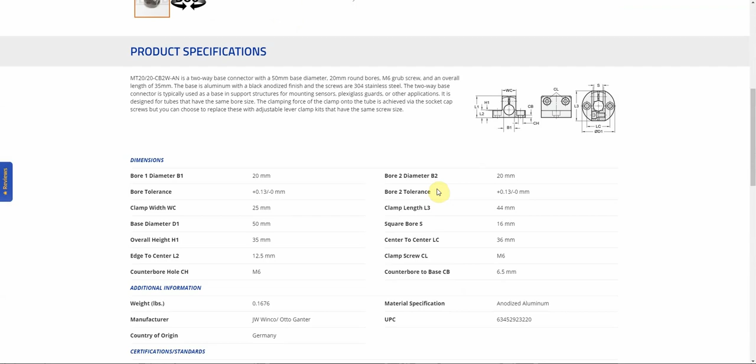It is important to note that this part starts with MT20, which identifies connectors, bases, and bracket clamps with a 20mm round or 16mm square bore. This is a unique identifier that makes selecting the rest of the components in our system easier. I quickly look over the dimensions and add to cart.

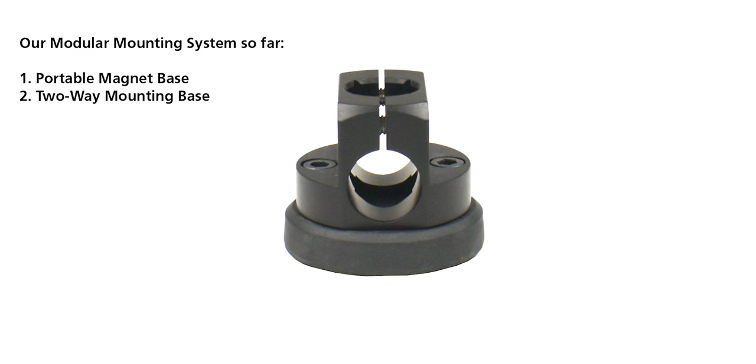I need a tube that can fit into the mounting base. I use the Fits with Clamps filter to see options that fit with my MT20 mounting base. I want a smaller selection and set my overall length to the longest size available, 300mm, because I will need to precisely adjust the sensor within a range of about 150mm. The option with scale is best suited for my system. I'm adding to cart directly from this page since there is nothing else dimensionally I need to review.

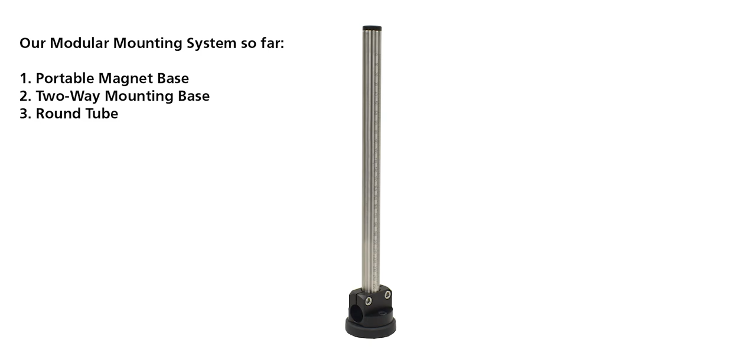I also want to add a tube cap to the end because I'll be running wires through my system. When I install the system, one modification will be drilling a hole in the top of the tube cap to feed the wires through. This helps protect them from coolant, chips, and other contaminants in the operating environment.

I go back to the tubes and rods section, select tube end caps, and filter to see options with the 20mm OD. There is only one option. Each tube has only one tube cap that fits, so I'm safe to again add directly to the cart.

Now that the bottom half is complete, I need a mini clamp connector with two bores to connect the top and bottom half of my system. The adjustable two-way connector is a good choice for me because it allows me to easily adjust the angular positioning and height of my sensor as needed.

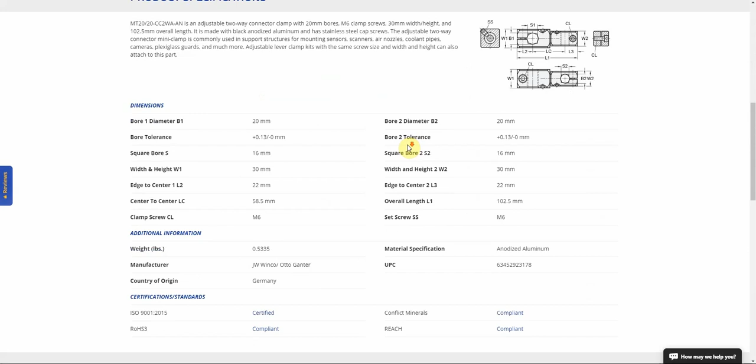I know my tube fits with MT20 clamps and there are only 12 options, so I simply scroll until I see an MT20 adjustable two-way connector. I click into the part to review dimensions. I take note of the 30mm height and width and the M6 clamp screw.

These two dimensions will help me find a clamping lever kit to pair it with. I add it to the cart and move on to selecting my clamping lever kit.

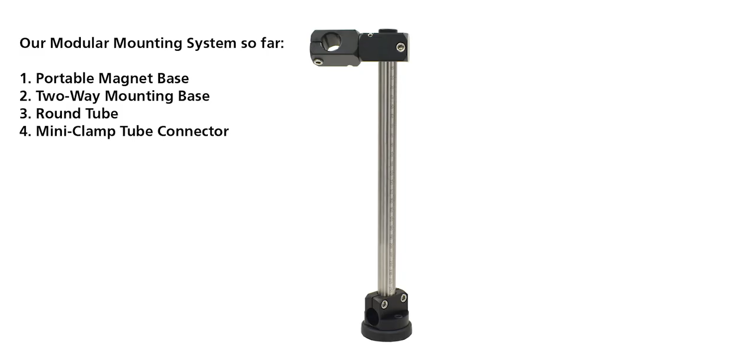The clamping lever kits are used to replace the standard clamp screw with an adjustable clamping lever. It allows me to adjust the clamping pressure of the connector with no tools, making it simple to reposition my sensor height as needed. I go into the clamping lever kits for mini clamps and filter my options to see what has a sleeve and stud length of 30mm to match the width and height of my connector.

There is only one option that has M6 in the part number, so it's the one I need. I click onto it to see the dimensions and confirm it meets all of my requirements, and then add to the cart.

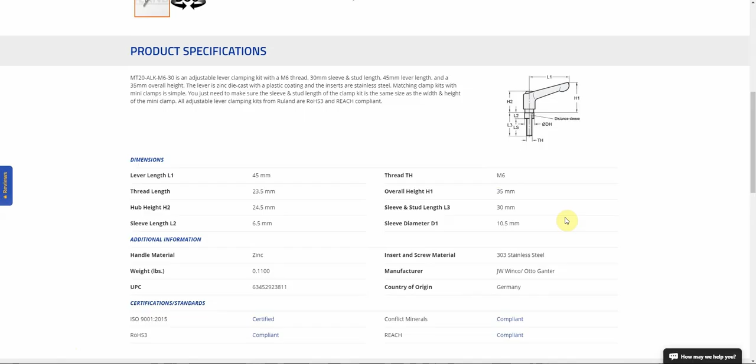Next, I need another tube to add to the other half of my adjustable two-way connector. I go back to the tubes and rods section and filter to see which tubes fit with MT20 clamps. This time, I want the shortest length, so I filter to see what my options are with a 100mm length.

The height of the top half of my system won't be adjusted, so I don't need a scale. The square tube is my choice because it's lightweight. I look over the dimensions, take note of the 16mm square OD, and move on to finding a bracket clamp.

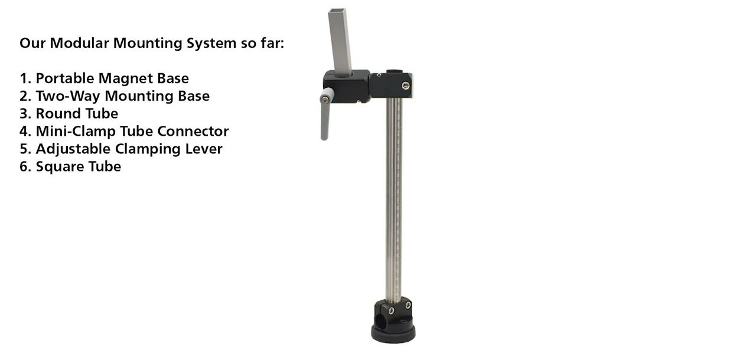There are not many bracket clamps to choose from, so I scroll down instead of filter until I see the MT20 options to fit with my MT20 square tube. I want the anodized version and click into the product page to review dimensions.

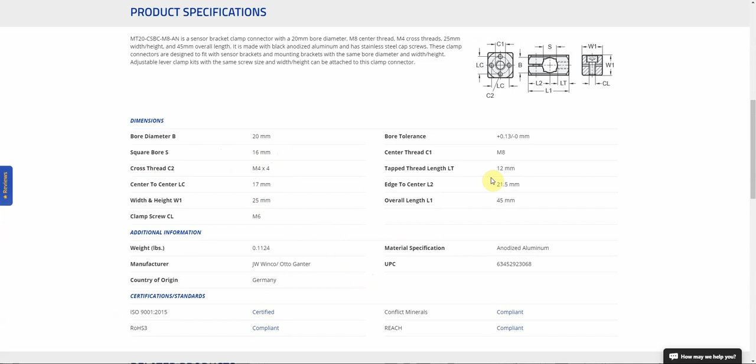When reviewing, I double check that it has a 16mm square bore, and then look over the center and cross thread dimensions, which allow me to mate it with a bracket clamp. I note that this part has an M8 center thread and M4 cross threads. Add to cart and move on.

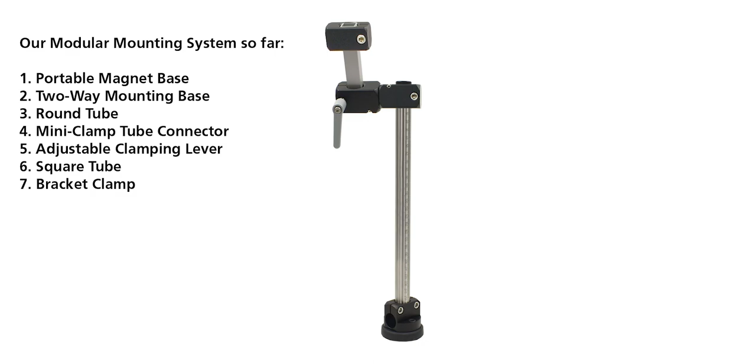Finally, I need to find a mounting bracket that can fit M8 center and M4 cross threads. I filter by the M8 center mounting screw and notice that they all have the same cross pattern as my bracket clamp. Any of these would work for me, but I filter by 12mm bore diameter because I already have a 12mm round sensor. I check the specs to verify it can pair with my clamp and move on to checkout.

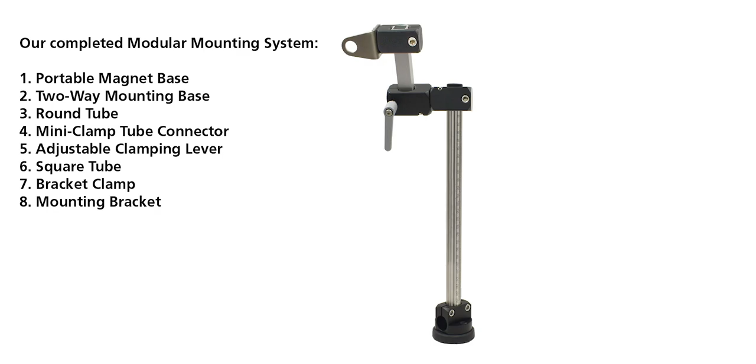We have successfully built our sensor mount system. I quickly review the cart to be sure I have my portable magnetic base, mounting base, round tube end cap, two-way connector, mini clamping lever kit, square tube, bracket clamp, and sensor bracket.